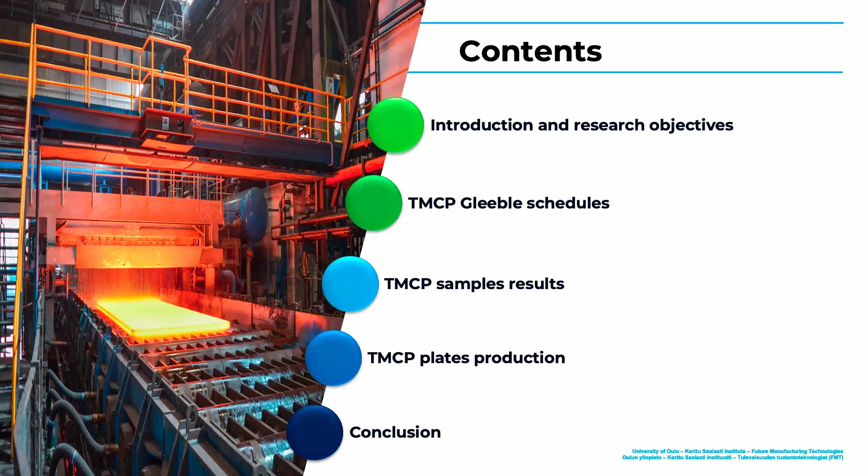Quickly I will go through a short introduction, then introduce the TMCP Gleeble schedules or samples, then the results from these samples, then moving to production of plates at production scale, then conclusions.

Regarding austenitic stainless steel, in general they are promising grades of steel for cryogenic applications, and particularly we are targeting in this research storage tanks for liquefied hydrogen and liquefied natural gas. This is because of the high strength and ductility for this type of stainless steel, low temperature performance, corrosion resistance, and weldability.

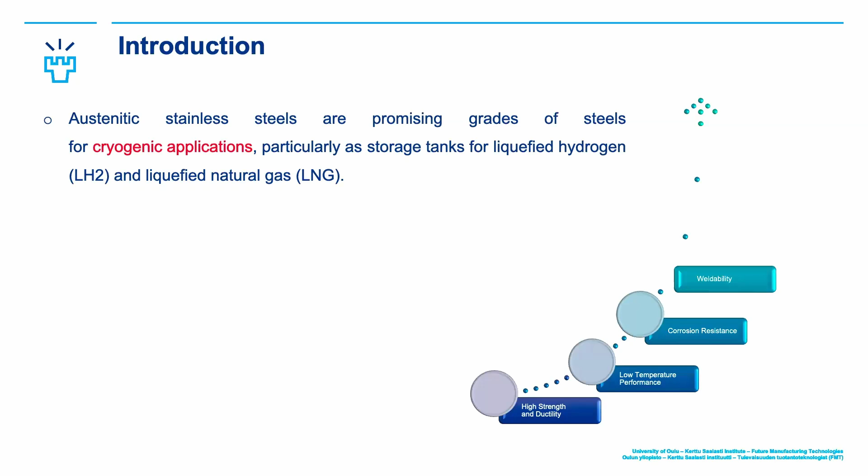Specifically, if we are talking regarding 201LN, we will have one or two advantages, but the main advantage would be cost effectiveness because of the elements used, I'll show it, and then of course the toughness and ductility at cryogenic temperatures.

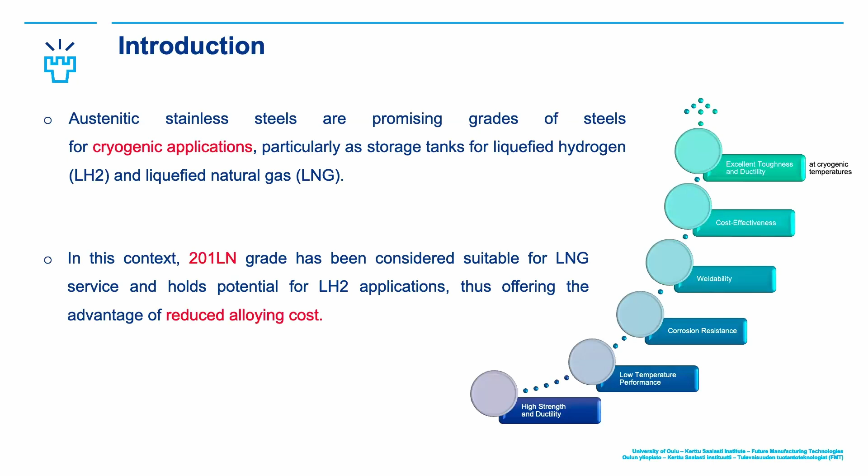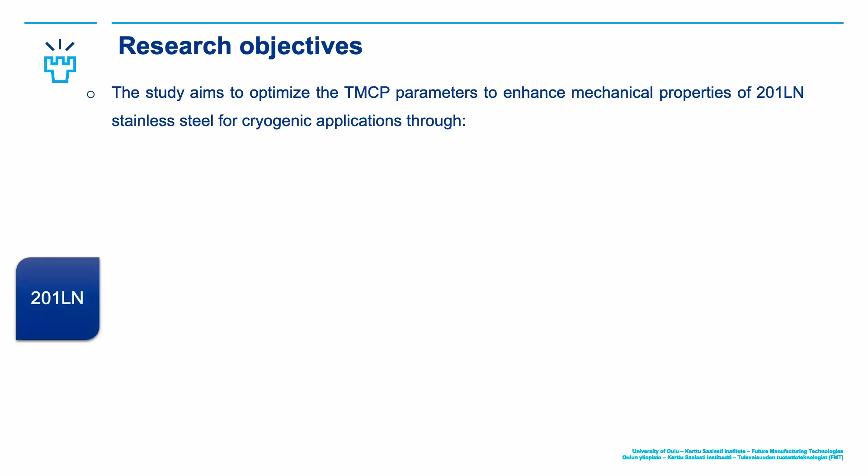The study aim or focus is optimizing the TMCP parameters for these kinds of steels to enhance the mechanical properties. This is the general scope of our study, and also the research steps we have taken.

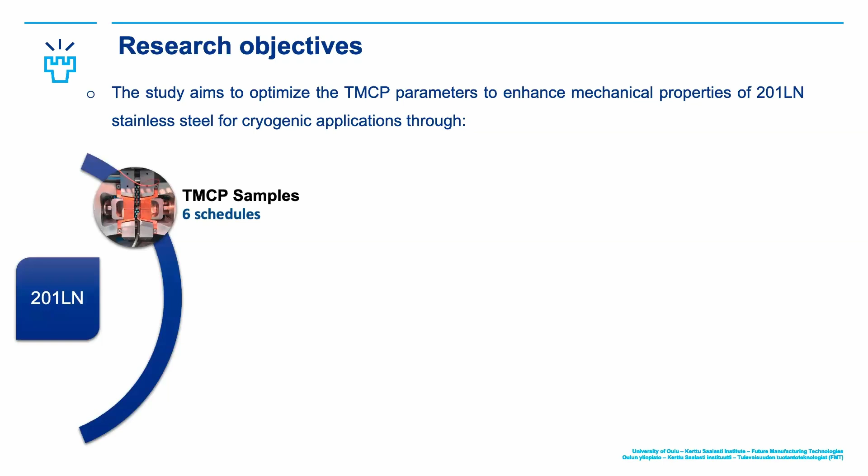First, producing samples to simulate using Gleeble. We have selected 6 schedules, which I'm going to show in the next slide. Then doing some microstructure and hardness characterization of those results from Gleeble. Then finally, selecting the final parameters and producing it in a semi-industrial scale rolling machine, and then testing the tensile properties and seeing the enhancement for those kinds of parameters.

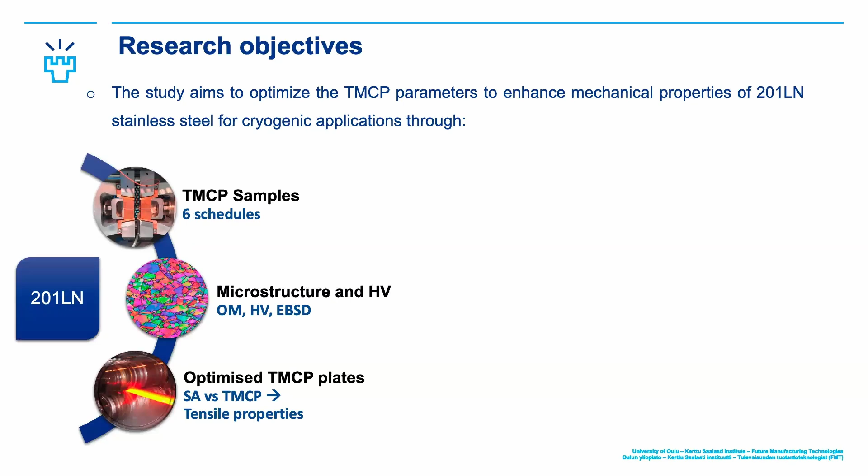Initially, we produced 80 kilogram ingots, then subsequently hot rolled with roughing to reach a thickness of 60 millimeters. This thick plate material is the starting material for all the TMCP samples.

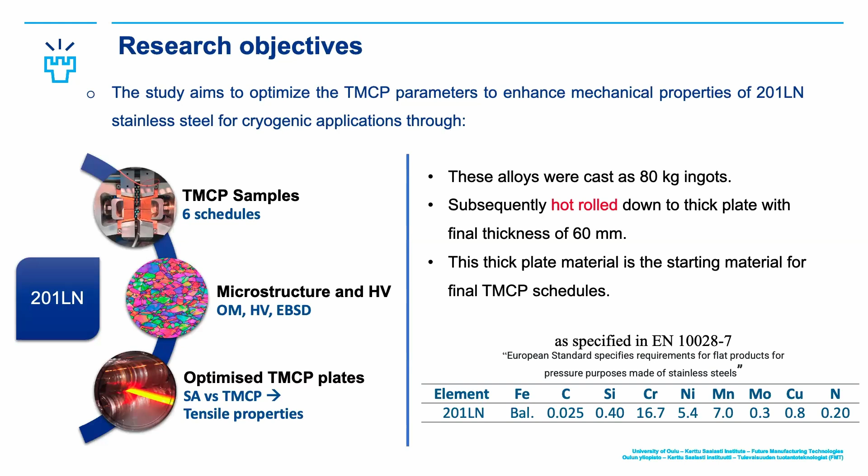And of course, after that, the TMCP plates. As specified in the EN standard, this is the composition, or the actual composition, of the 201LN used. Here we could find it almost at the higher limit of manganese content for this 201LN.

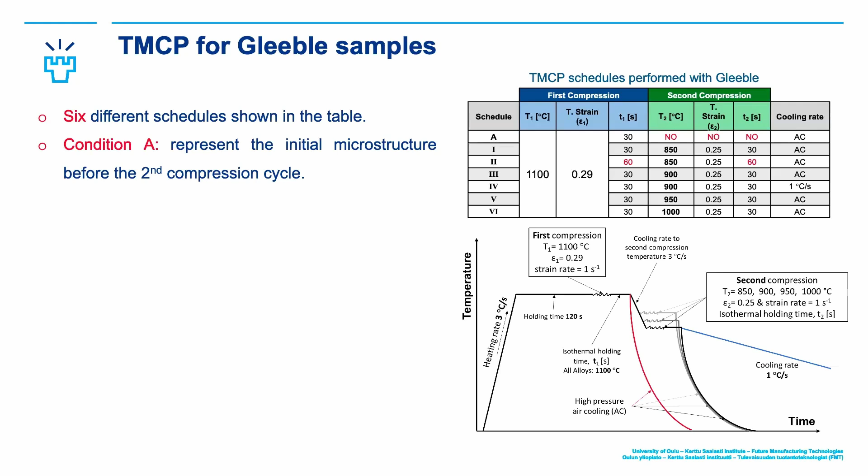At this point we have, sorry, forgot to mention, there was one schedule with very slow cooling, a controlled cooling of 1 degree Celsius. This is also an important point. At the same temperature of 900, we have 2 points, one slowly cooled and one that is almost quenched or air quenched.

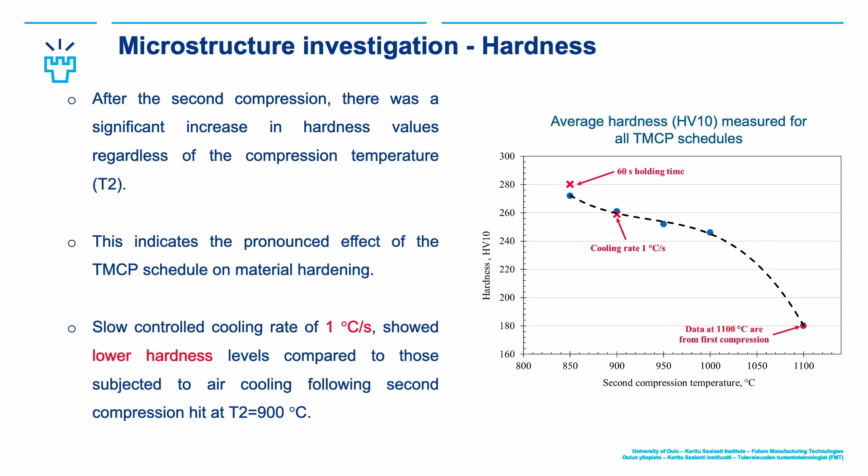This is the 60 with the holding time. So hardness here decreased with the longer cooling rate, but we have this weird behavior of increased hardness for the longer holding time, and this may be due to some recrystallization happening inside, but we are still investigating more regarding this point.

Moving forward with the optical microscopy, according to our investigation, we found that we have a mix between the statically recrystallized and deformed grains. So to have an accurate estimation of the grain size, we compared both methods: arithmetic mean and area weighted size.

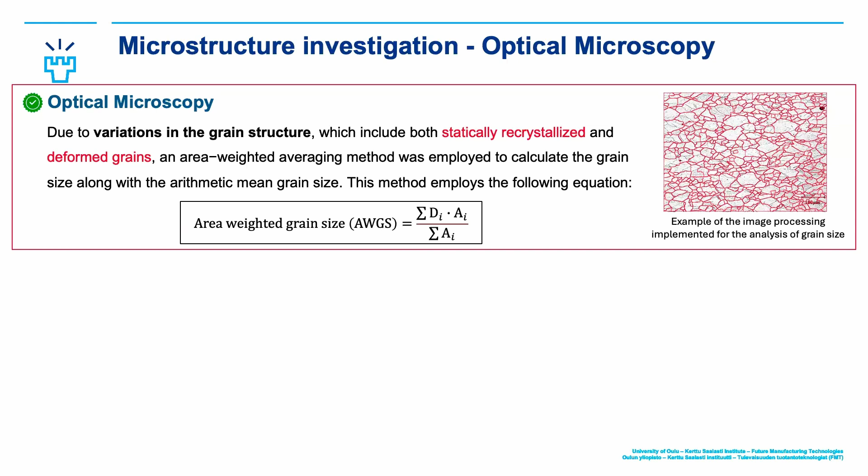We used image processing incorporated with machine learning to accurately measure the grain size, and then we could have accurate data for each single grain, and accordingly apply the area weighted grain size. For the results, we have almost the same trends, but I would trust more the area weighted grain size results.

This is what was recommended for this kind of study. From the results, we can see that at 850, when we are holding more time before cooling, there is grain growth happening, so that's the deviation here. And for the slow cooling also, we have relatively higher grain size. But for all schedules, the grain size was much lower than the initial condition, the A condition I mentioned in the beginning.

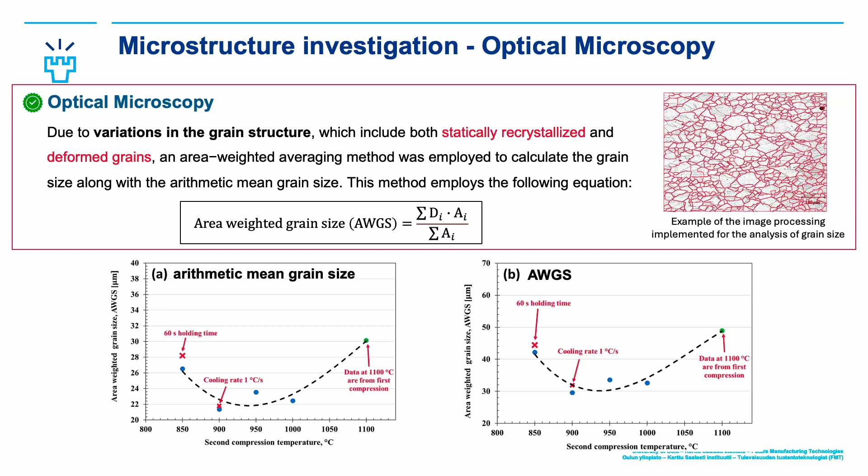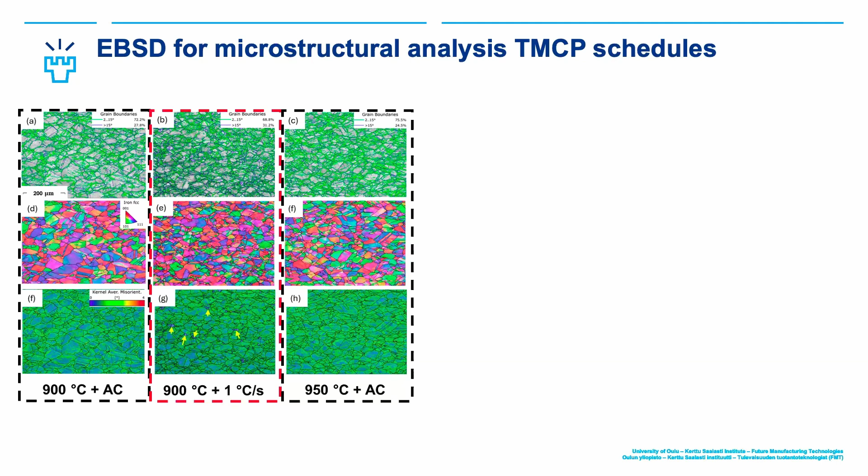Moving to the EBSD, we have selected specimens for 900 air-cooled and 900 slow cooling, or controlled cooling of 1 degree Celsius, and 950 with air cooling. The only thing to mention is that there are strain-free grains with this slow cooling, which could explain why we have lower hardness for this specific case.

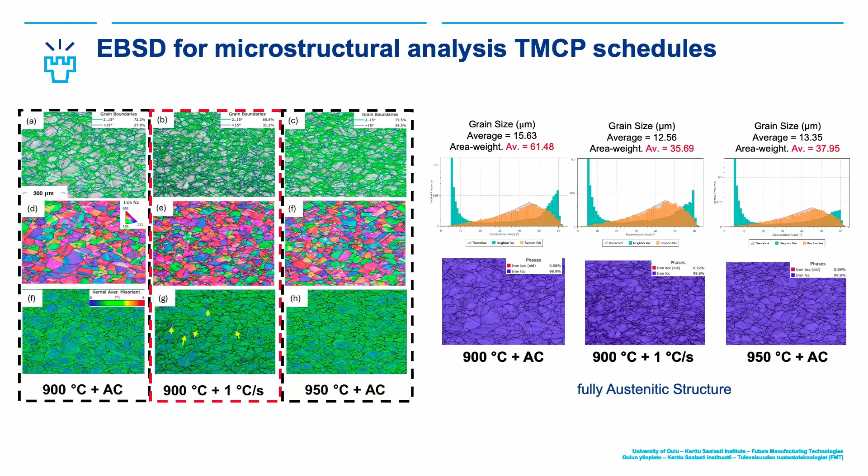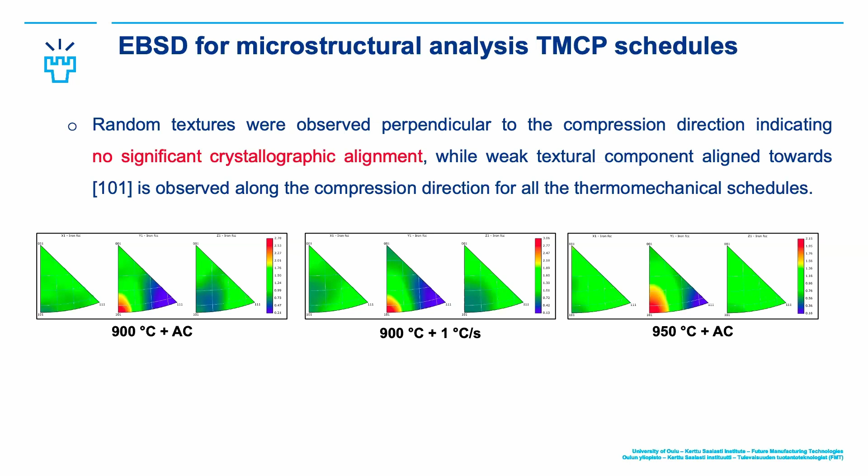We also had the average grain size, and just to mention that this is still fully austenitic out of this TMCP sample, despite those small fractions of 0.06, which may just be error. Also, for the texture, it was random textured except in the y direction, which is the compression direction, so because of the pancake grains, there is this effect.

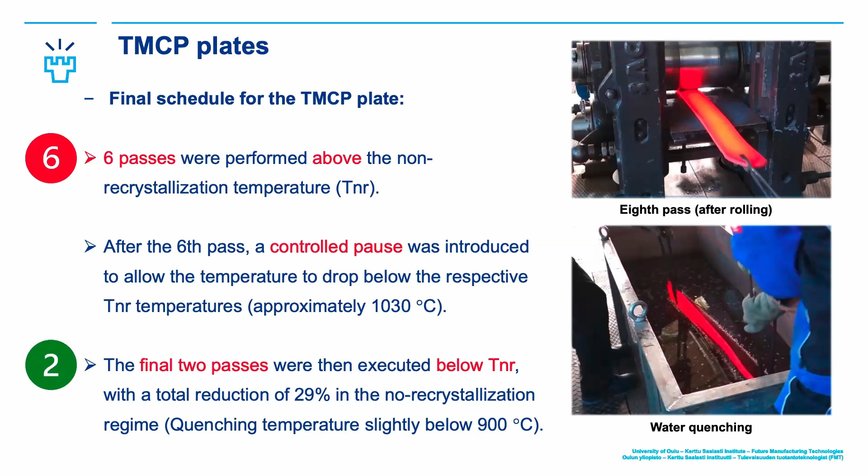Exactly, it was 890 for the final quenching step. We produced these samples from the TMCP plates according to the ISO, and we also produced one solution annealed plate for reference or comparison.

We could see from the results that if we take the solution annealed case as a reference, we have an enhancement of 72% in the yield strength. The yield strength reached 673 and the ultimate reached 860, with a relative enhancement of 23%.

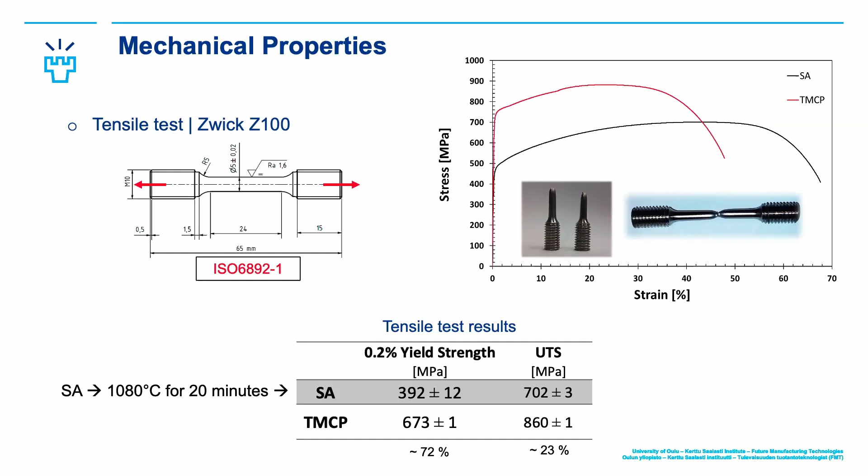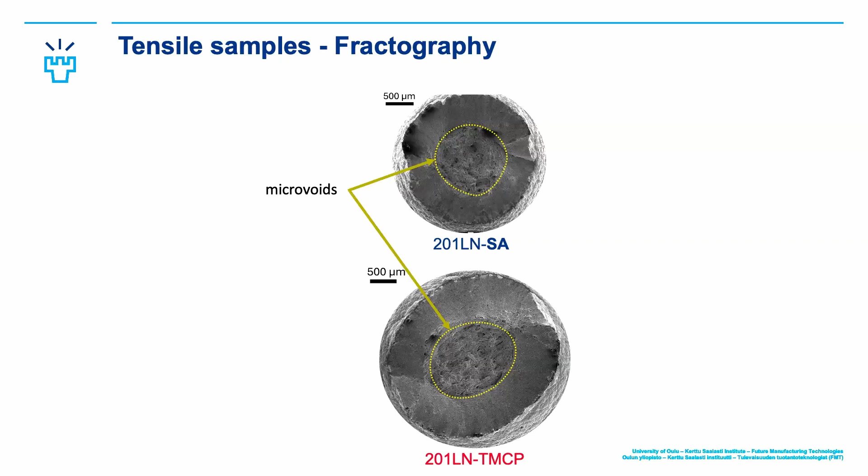Finally, for the tensile samples, the fractography: in the beginning we could see clearly, this is the TMCP plate sample and this is the solution annealed, on a relative scale. We could see that the ductility, or the reduction in area, is quite higher.

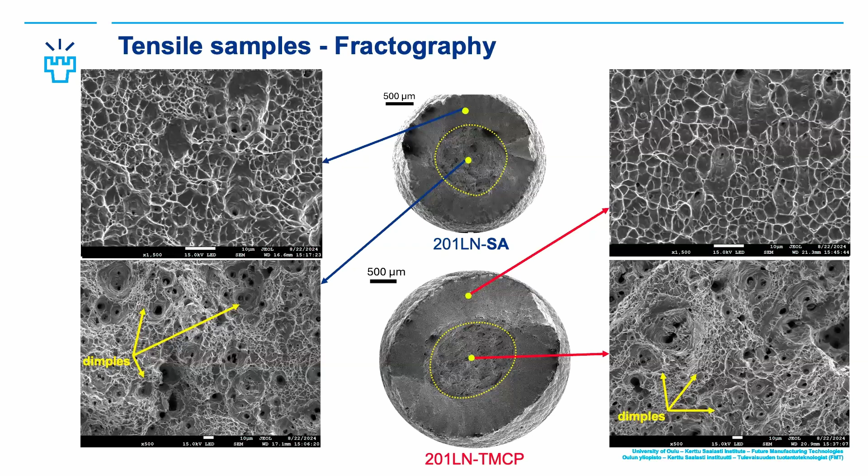Microvoids and shear zones are quite clear, and the SEM image also shows the dimples. In the shear zone we have deep dimples for the solution annealed and shallow dimples for the TMCP plates, which are quite common features for this kind of failure. This is a zoomed-in SEM image.

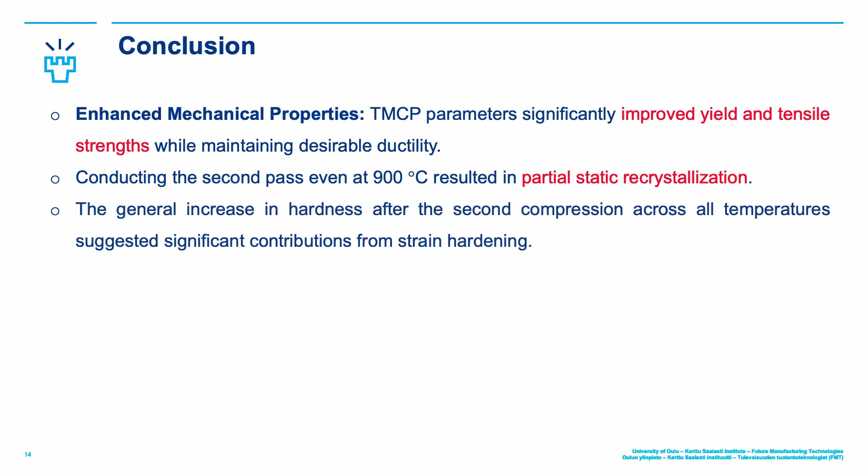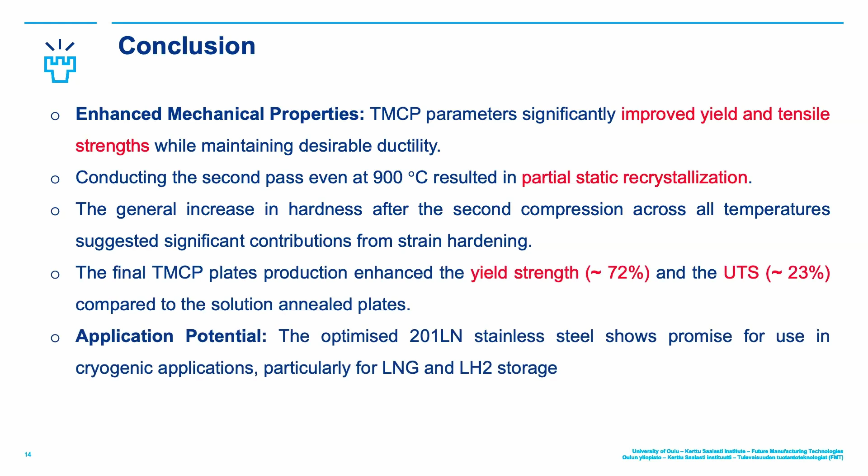For conclusions, we were able to achieve enhanced mechanical properties for this 201LN stainless steel. The second pass at 900 results in partial recrystallization, despite this temperature being below the TNR, and a general increase in hardness for the second compression. Final TMCP production enhanced yield strength by 72% and the ultimate by almost 23%. We are expecting that this enhancement could be potential for cryogenic applications.